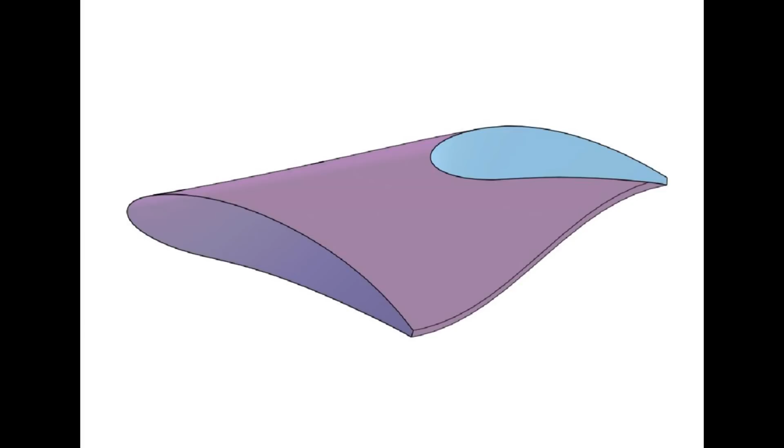The F1 Formula One car. Now of course we've been working with airfoils because we made the NACA 0015 out of some aluminium sheet. So we've had experience of making airfoils. We understand, I would think, this idea of the Venturi.

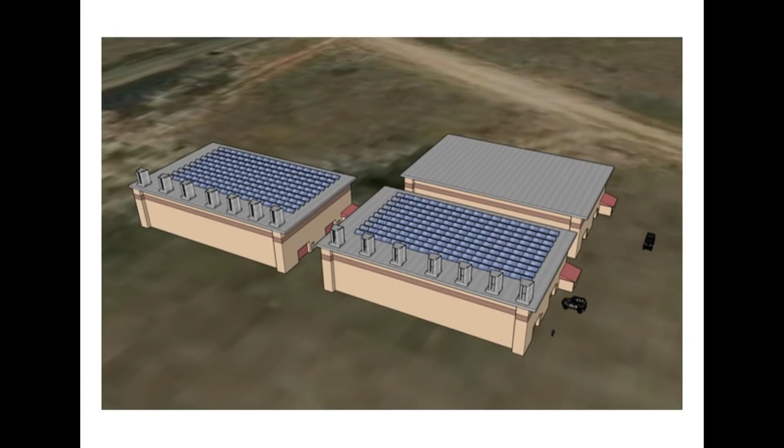So the next step would be for me to build an Aeromine that was suitable for home installation, because one of the great things about Aeromines is that's what they're designed for. They say that if they install these on the roof, they'll take up about a third of the roof space that equivalent solar would take up. So it's an awful lot more energy dense for the area that it covers, and I believe it to be something that we could actually build ourselves.

And because it's so unobtrusive, your planning permission would not be such an issue, and of course the maintenance is not such an issue because you don't have the great big motor sticking up in the air and massive propeller blades. Now the general shape of the Aeromine is like this.

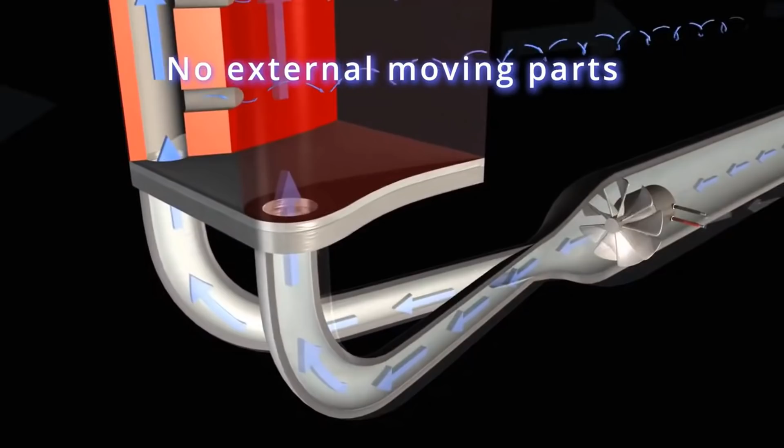If you look at that, you can see it's kind of a horn-like structure, and you can see where the wind is blowing in. That wind creates the pressure and it pulls air through a ducting system, a bit like a manifold, into the cone, the exit cone. That then runs a propeller, and that propeller or fan or turbine that's now in the housing is clearly at ground level. Being in the housing there, the air is forced over the propeller, and that's what generates power.

And of course there is an awful lot of research. Sandia have been at this for a while. They're not just springing it on the world because it's an idea. So if you have a look at ResearchGate or have a look at Google Scholar, you'll find a lot of information about how this Aeromine can perform.

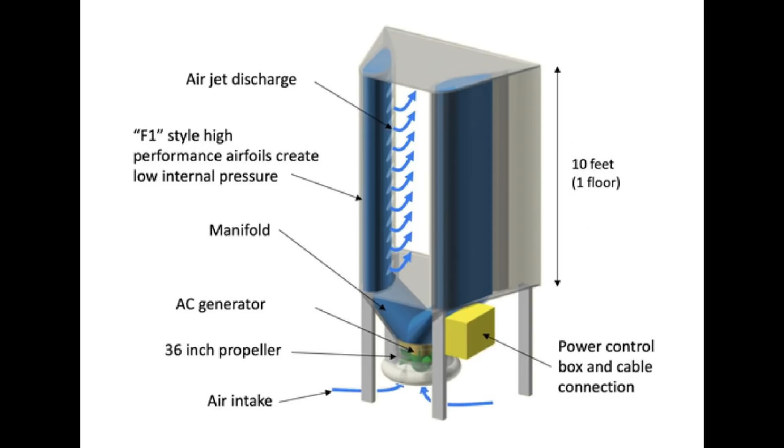Now, of course, our interest is not so much that. Our interest is, can we actually build this thing in a cost-effective way with sufficient performance to merit a bit of concentrated effort to make a few of them and stick them on your own roof and make your own generators that would be cheaper and easier to install and cheaper to run. That, of course, is what I'm very interested in.

I'm very excited by this news, and I didn't know about it until it was pointed out to me, so thank you very much for pointing it out to me. Very excited by it, and clearly my very next thing is to create those airfoils, those F1 airfoils.

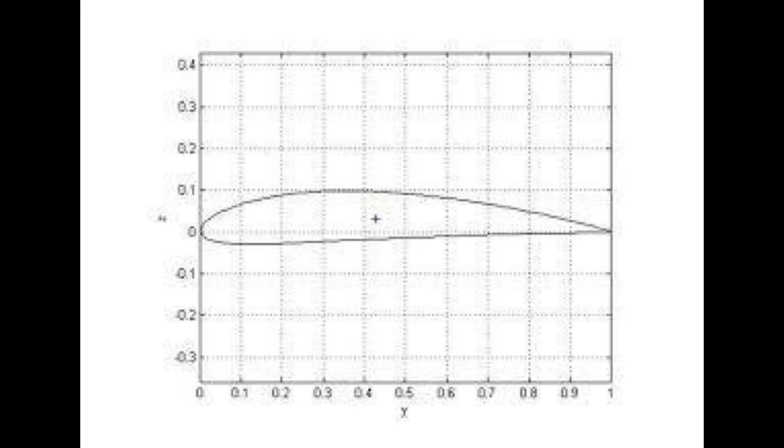Apparently the most commonly used airfoil for the front spoiler of a Formula 1 car is the NACA 4412. Now the F1 airfoil has this kind of shape, and we can see that it's a very different shape from the NACA 0015. It's non-symmetrical, so we have to bend an airfoil into an asymmetric shape, put the ducting in there, connect it to a manifold and connect that, probably for test purposes, to a PC fan. We do that, we should have ourselves a working Aeromine.

So the next series of videos is going to be on building a working Aeromine so that we can actually test it. And I think that's really quite an interesting idea. I was so pleased that this was pointed out to me. I find it very exciting because it looks like it combines a lot of things we've already been thinking, but into a unit that has a backup of research and a lot of experimentation to actually make it work.

Anyway, I thought I would raise that for you and show you what was going on, really. A quick search on the net will show you an awful lot about Aeromines. It certainly looks extremely promising, and it certainly looks like a fun project build so that we can create something that would be able to be used by us at home level to generate sufficient energy at a reasonable cost that's easy to install. They're my targets for wind generation.